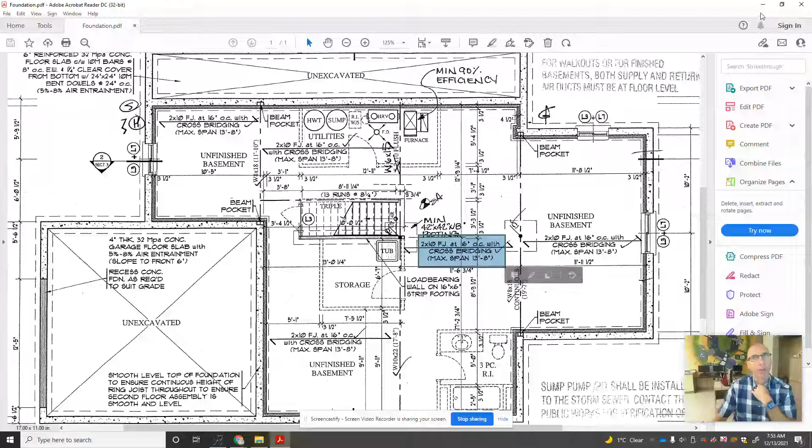Okay, and so these are 2 by 10, 16 inches on center, and they're all 2 by 10, 16 inches on center, so that's nice. We can just simply make sure they're all the same. So in here, let's double check our sill plate and make sure it's the right size. So if we click on it and hit edit, you can see that it's got a depth of 1.5 inches, which is the thickness of a 2x material, and its width is 5.5, which is the 2x6. So that is the right material.

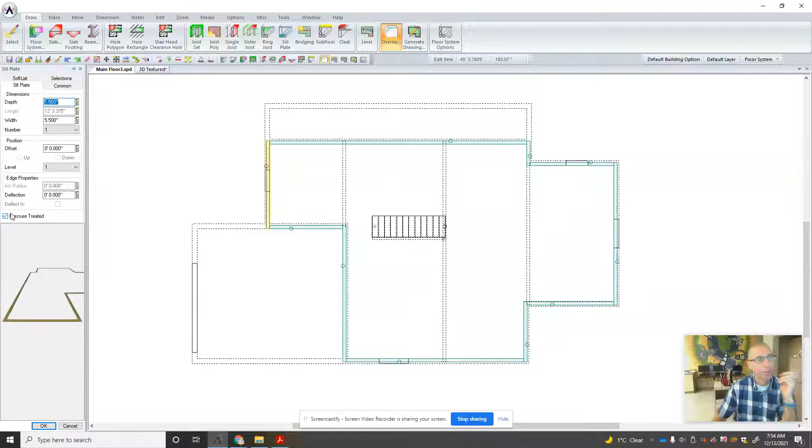It's pressure treated. We could turn it off and not make it pressure treated, but we'll leave it pressure treated for now. It's against the foundation, so we'll leave it like that. Got to figure out what the standards are on that just yet. So we're going to click on joist set. Okay, we're not going to do it joist by joist. That will take way too long. So we're going to draw it by a joist set. We're going to start by drawing the joist set right here in this small section.

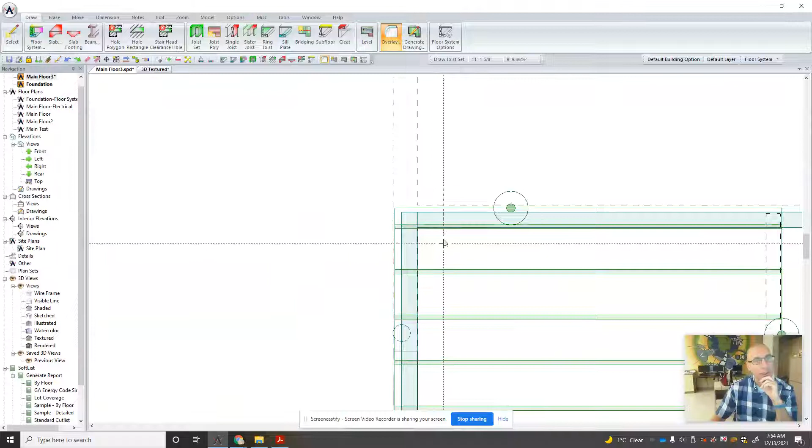So you just want to click to draw a rectangle and drag, click and hold and drag it out past the beam. Okay, and automatically the joists are going the right direction. I'll show you how to change that in a second. And you'll notice that it is just joists. There are no rim joists on this structure at all. It is just joists. Okay, and right now they're a little bit beyond my sill plate, so I can adjust that. When you click, you can see how it's kind of hovering over and it highlights that versus highlighting the sill plate. So make sure you're selecting your joist, and we can drag it back a little bit. We'll leave it overhanging the beam there.

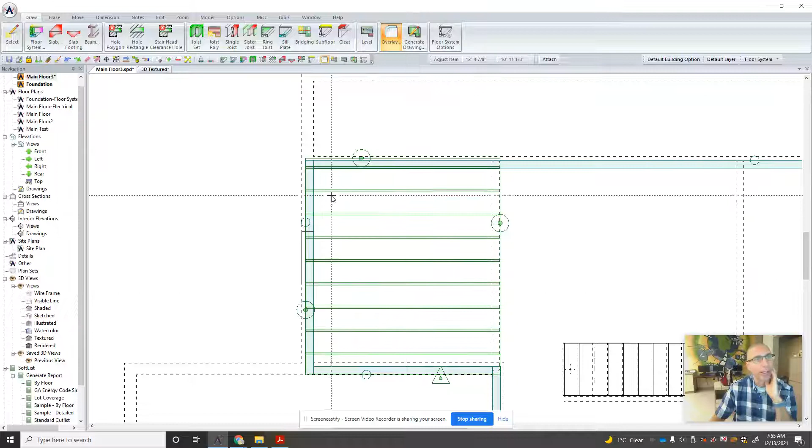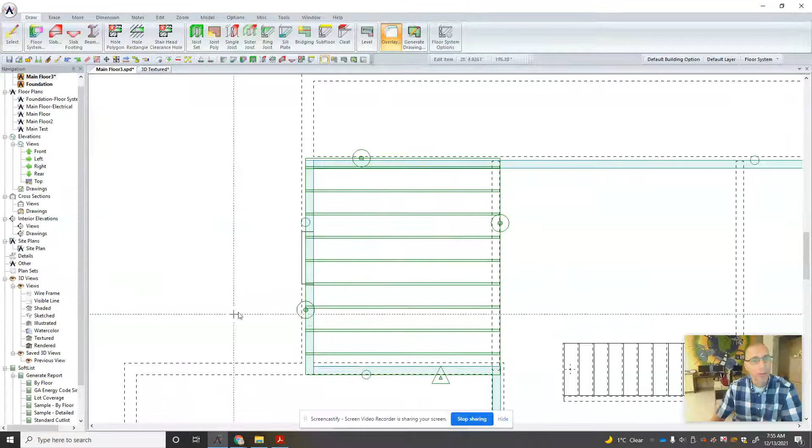If we wanted to adjust which direction they would go, we simply click on the edit, and this triangle here is the reference point. So this is the reference side for the joist. So if I click on this circle and say make that the reference edge, you'll see my joist change direction. Okay, so I'm going to cancel that because we want them going this way. That's how we simply draw a joist set. So we're going to do the same in all 4 sections here.

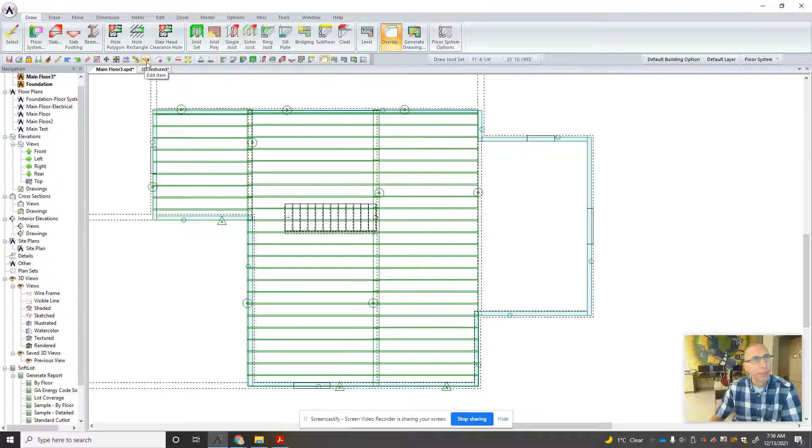So joist set, click, and make sure you're on the other side of the beam here, because then that'll help with the overlap. So I'm going past the beam here. Right. And you'll notice that SoftPlan is a smart program, and it automatically staggers the joists. So we're good there. We'll come back to our stairs in a minute. We're going to draw this out. Like that. This is a little tricky because these 2 walls don't line up. So we need to get this joist structure to the beam there. So let's adjust that out. It might be easier just to adjust that wall. It's one of the tweaks about SoftPlan.

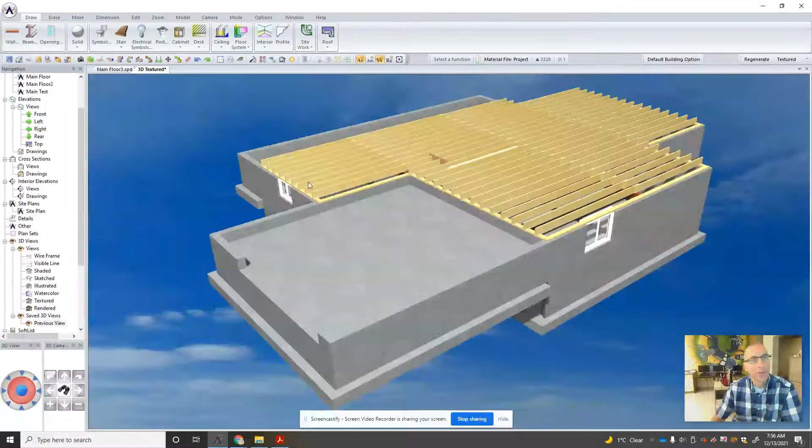So one more joist set out here on this section. And there we go. Now the center didn't stagger very well. Not sure why. Let's edit that. We edit that down here on the very bottom of this edit. It says stagger. We can click on that and it will stagger it. And now we need to do the same with this one and stagger. So there we go. So that's that. So click save. Jump into your textured, and now you have all your joists set up. Okay. We'll quickly put a hole in there for the stairs.

Let's go back to the main floor. We simply go up here to hole rectangle and draw a box around the stairs like that. And you can see that SoftPlan does some smart framing as well. Doubles up joists, makes beams, all that kind of stuff. We can adjust this opening if we want to get it nice and tight to the stairs, like that. We could bring this back even so it's like here and over top of the beam, because normally you wouldn't have full head clearance there, but that's okay. As long as the stairs are exposed, we're good.

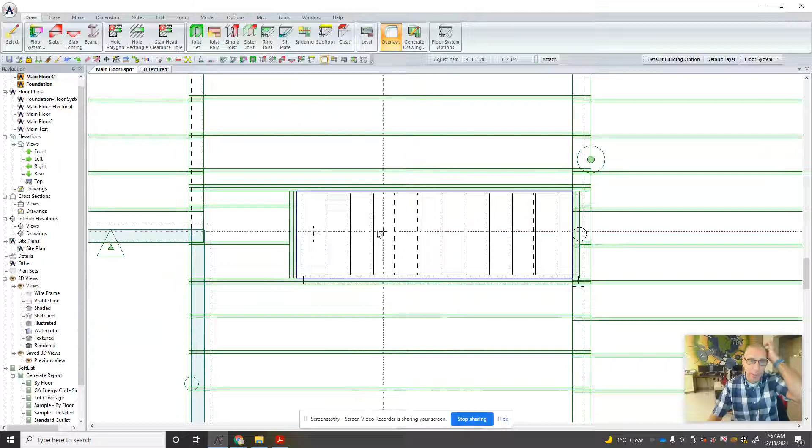If we go back to textured, you can see there's the hole for the stairs in my floor system. So there's our joist set ready to go. Much easier in SoftPlan than it is in Google Drawings. Save that, and then we'll come back and do our rim joists.